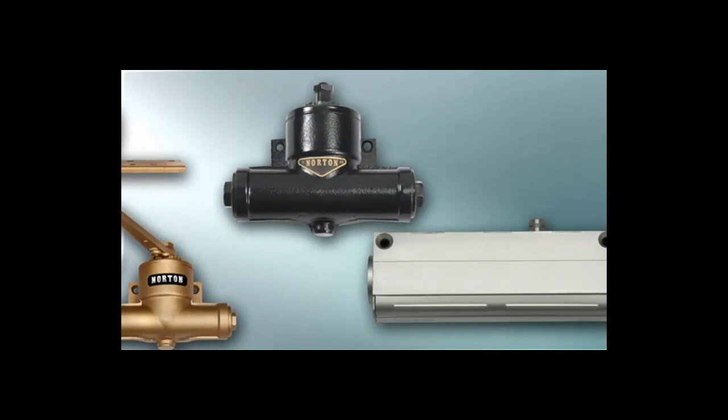In the mid-1870s, at a pastor's request, Lewis C. Norton quieted a door at Trinity Church in Boston with his first door closer. From that Boston church to our headquarters in Monroe, North Carolina, things have come a long way. But even with the many advances in product design and manufacturing, our focus continues to be on the needs of our customers. Our engineering team uses the latest software to develop innovative, high-quality, and reliable door control products. From standard door closers to fully electronic door operators, our products are designed with commercial and institutional environments in mind.

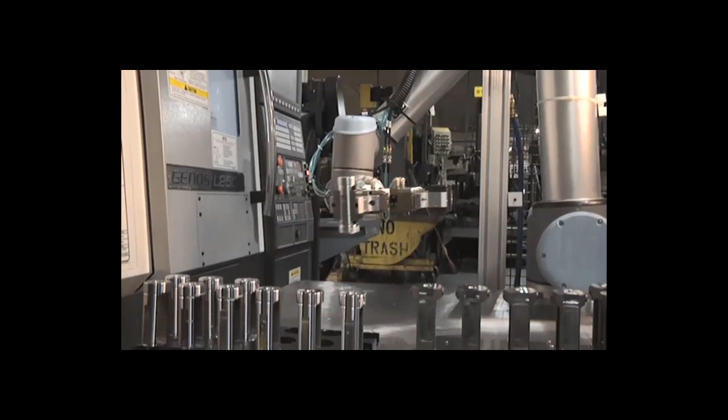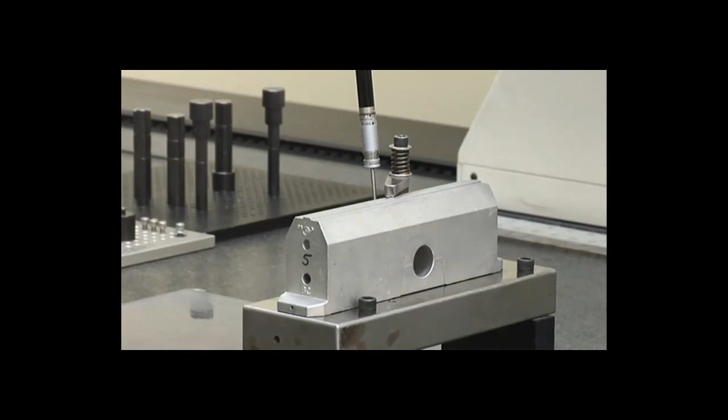These products are then produced using high-tech manufacturing and assembly techniques in our ISO 14001 certified operation. And of course, rigorous testing is done to ensure the quality necessary for tough applications and to meet ANSI BHMA standards.

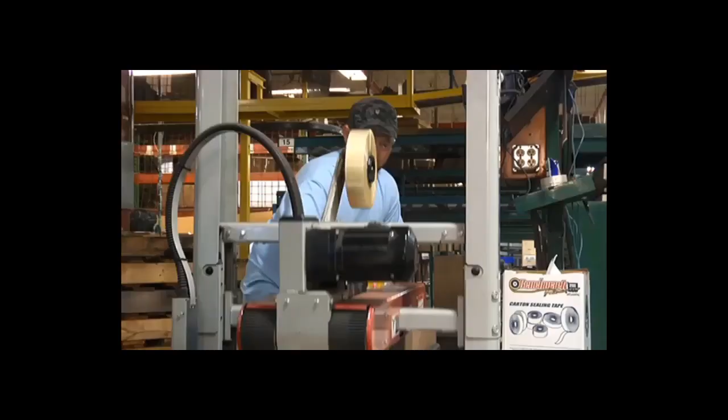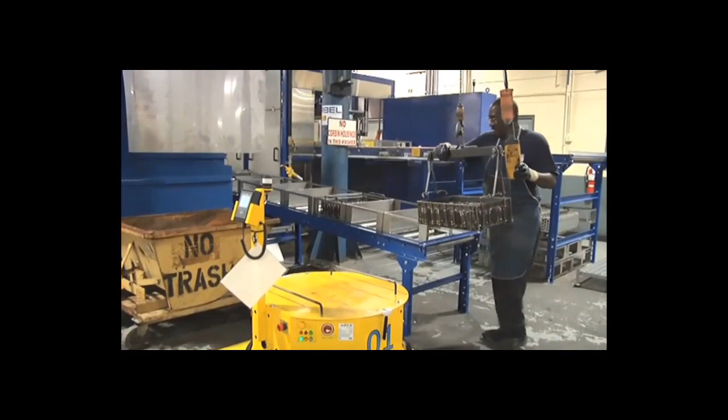And our most important asset is our people. These hard-working professionals are dedicated to making the best door control product you'll ever buy. And we're dedicated to making Norton a great place to work. For all these reasons and more, we think Mr. Norton would be proud of our continuing dedication to making innovative, quality products to meet our customers' needs.

I always like to show that video whenever we're doing a class on Norton. I think it does a really good job of explaining and showing all of the great things that Norton does and their rich history. One of the things that the video talked about was the ANSI BHMA testing that is done on site and then also third-party verified by the testing facility. So all of our Norton operators are third-party tested, and they're tested for durability, cycle life. A lot of the features are tested as well.

So when we say that it can handle a certain amount of use or abuse or cycle life or durability, then just know that all of that is being tested and verified, not just by us, but by a third party. So who is BHMA?

BHMA is the Builders Hardware Manufacturers Association. And the association develops and maintains performance standards for hardware. So you can have lever locks and mortise locks and deadbolts and door closers and all kinds of things tested to BHMA standards. And then ANSI is the American National Standards Institute, and they develop and oversee the process for how everything is going to be tested.

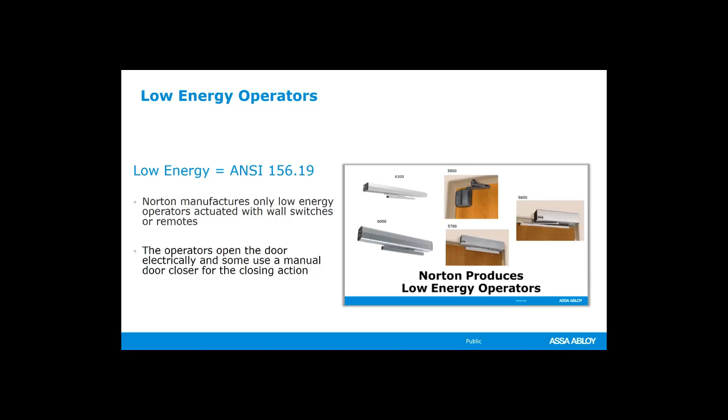That means a push button, a wall plate, a button close to the floor for areas where wheelchairs need to bump up against those buttons. You could also have a clicker, a fob that you use to open these doors. But they are considered safe right out of the box. That's why we're considering them low energy operators. You don't have to have any extra safety sensors added to these operators to make them safe for the general public.

You can, however, add a safety sensor to these operators, and the 6300 has the ability to have safety sensors that stop the door in motion if that safety sensor sees an obstruction. That obstruction could be you, it could be a cart, it could be something else in the way of the door. Those safety sensors are designed to stop the door in motion and either return it to a closed position or return it to a full open position, depending on how you have it set up.

Just because we can add a safety sensor and a motion sensor does not mean that we should hook it up in a way that that sensor is an activation. Technically, you could do that, but we would be turning that operator from a low energy operator into a high energy operator, and along with that, we have all of the regulations that go with it. So safety sensors for obstruction only.

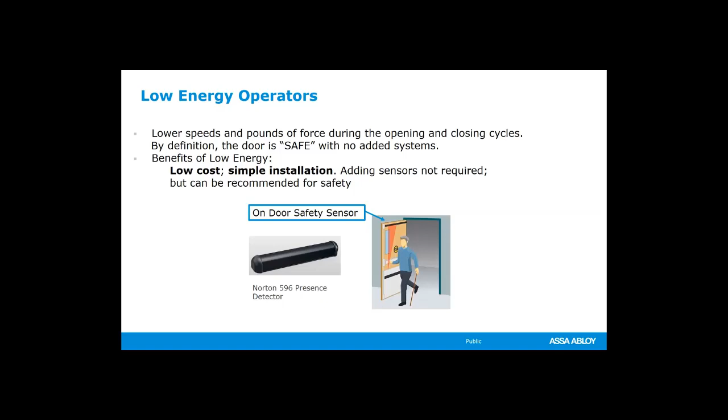So let's talk about some terms and definitions. Low energy operators are really designed to work like a door closer in normal use and can be used for ADA access. We do have operators out there that get used almost every single time somebody walks the door, using it by hitting the button, or using it in a push and go feature, which we'll talk about here in a minute.

But there are some similar definitions to door closers. Closing time is the amount of time from a full open position to close. But if you're talking about testing, testing is going to be from a 90-degree point. So when the door's open 90 degrees to when it gets to the 10-degree point, that's our closing time. Stick within the standard - we need to make sure that's at least 5 seconds. And then your last 10 degrees is your close check or your latch speed. That's also adjustable on most operators.

And then our closing force, how much force that operator is pushing into the stop to close that door, can be different between an electrohydraulic and electromechanical operator. Today's operator we're talking about is electromechanical, so we can change that force with the settings on the circuit board on the LCD screen. We can also change those settings using our Wi-Fi capable device.

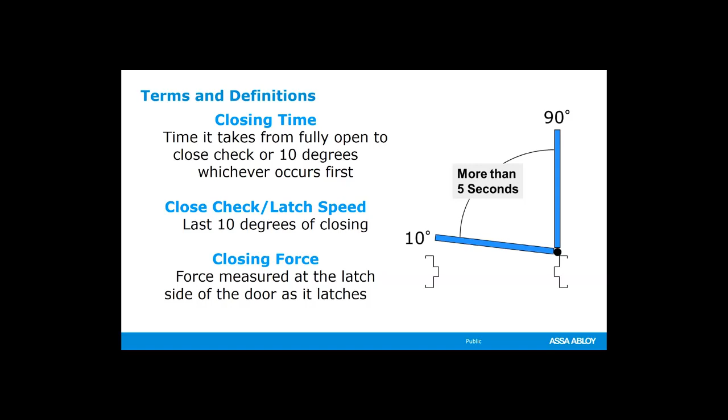So next, let's take a look at an advanced feature that we can turn on for the 6300.

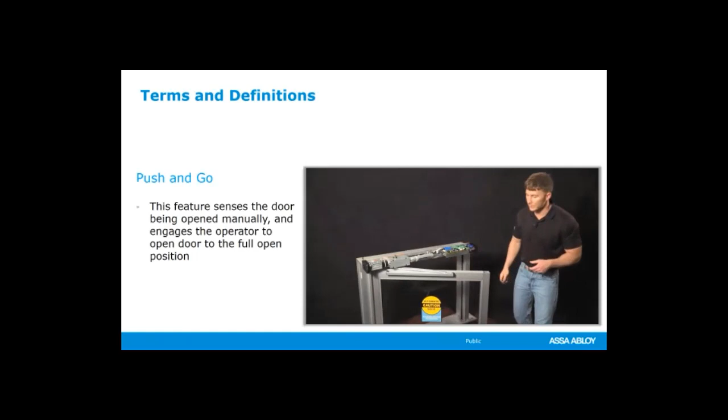Now, we should have an activation switch, but sometimes people don't see those activation switches, so power assist is a really cool feature built into the 6300 that we can turn on. The next feature we're going to take a look at is push and go. The way push and go works is if you open the door slower than the opening speed setting, the door will automatically start opening. If you open the door faster than the opening speed setting, it will not open.

It'll work just like a standard door closer.

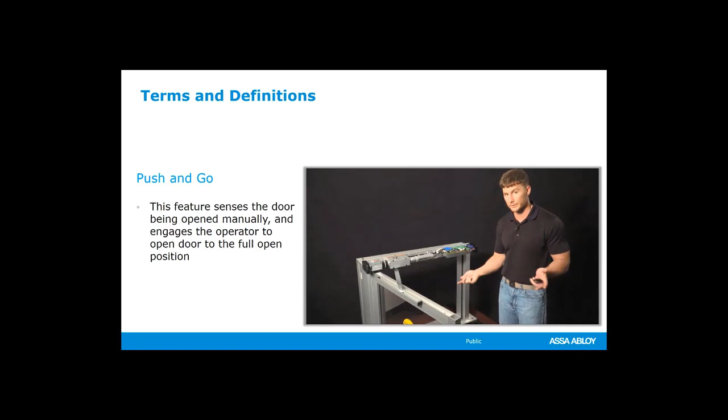This particular feature, push and go, is something that we can turn on. It doesn't come on automatically, but we can enable it if a facility wants it used that way. For instance, we have an engineering facility here in Dallas where all operators are turned on with push and go, because they're constantly moving carts in and out of the doors, and they want to be able to push the cart against the door. The door senses that movement and opens to its full programmed angle.

Now, earlier when I was talking about power assist, you cannot have power assist and push and go running at the same time. Honestly, I wouldn't recommend push and go in a facility where disabled people will be using the door, unless it's just wheelchairs. If somebody is leaning on the door for support and the door leaves their hand and goes to a full open position—on some doors you can program the operator to open all the way to 180 degrees—that may startle the person, they may lose their support and potentially fall and injure themselves, so we don't want that.

Next, let's talk about obstruction detection.

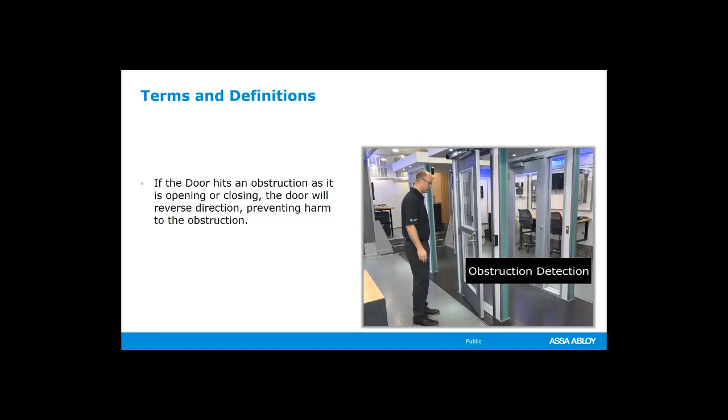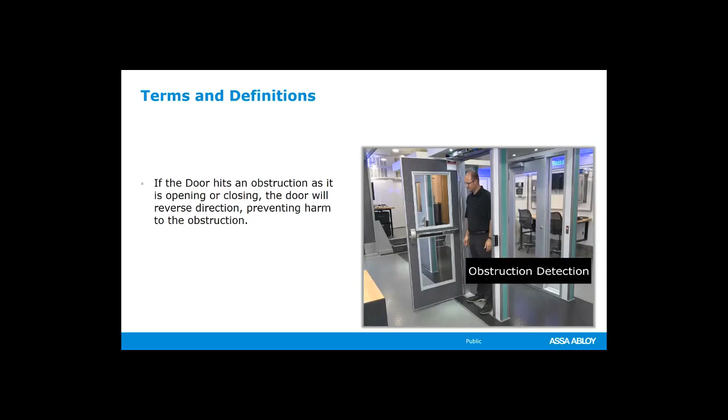Ever since this operator came out, I've been very impressed with the obstruction detection capabilities. This operator can sense obstruction detection on both the opening and closing motion of the door. We can actually adjust how long the operator pushes on an object before it deems it an obstruction—not the force, but the time—from 1.5 seconds all the way up to about 7 seconds or so. I'm really impressed by how lightweight it is; it doesn't push against an object very hard before triggering that obstruction detection. Many of these settings are adjustable.

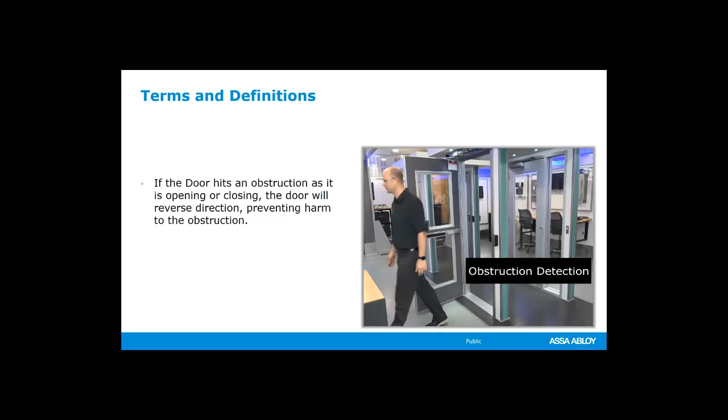This particular operator, as well as our 6000 series, has the ability to be hooked up in a vestibule situation. A button press on the outside of a vestibule will trigger the first operator, and then you set an opening delay output, meaning we signal a second operator to open after that delay, so a user only has to press one button on the outside and the second operator opens automatically. You can also set it up in reverse if they're on the inside of the building.

So vestibule delay—these are advanced things you can get on some of our competitors' products, but you have to pay extra for them. On some of them you have to pay extra for built-in relay boards that get mounted on, and Norton likes to include these automatically.

Next, in some facilities you need the operator to go from a full closed position to a full open position if the fire alarm or smoke alarm goes off. In some facilities there's a safe smoke area at the top of the building for evacuation, and we can trigger that with an output and an input that allows the operator to open whenever the fire alarm or smoke alarm goes off.

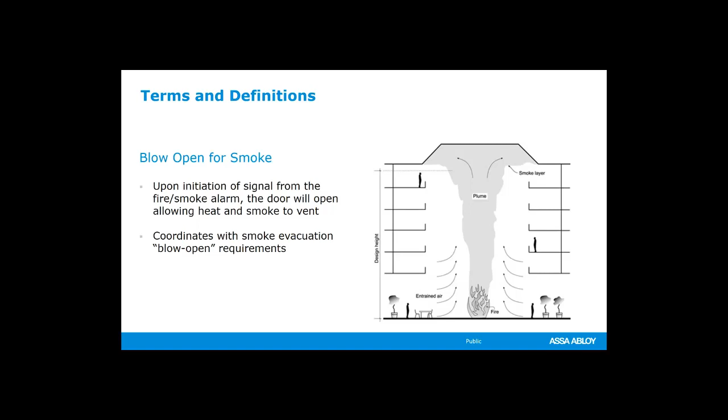Next, we're going to watch a quick video that does a good job going through an overview of this, and then we'll get into some more detail.

Smart, simple, and good looking. The 6300 low energy door operator offers users enhanced safety and operation while blending with the aesthetics of your facility. Important safety options like latch assist ensure doors close and latch, while obstruction detection safeguards all users. Push and go and power assist make each person's interaction with the door almost effortless. A modular 4-piece design with a full-length backplate that doubles as a template allows for easy installation.

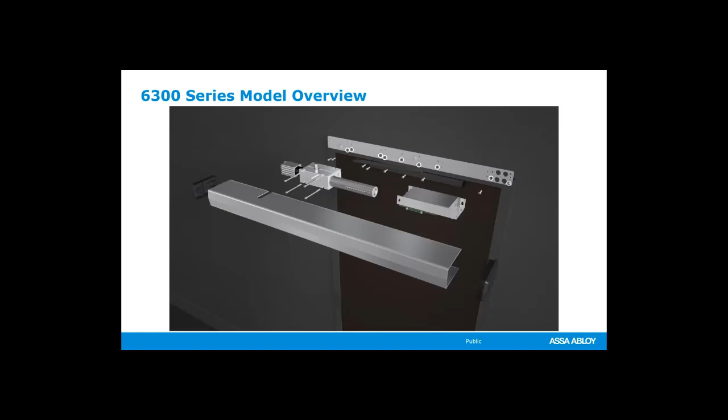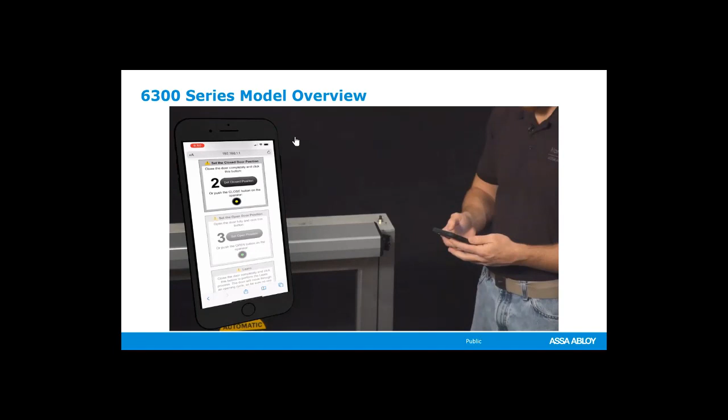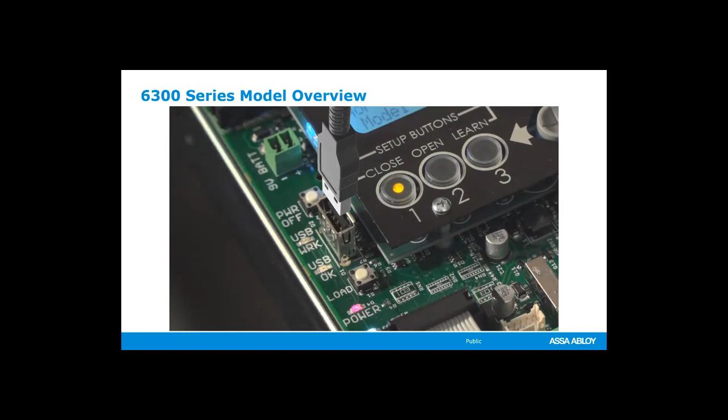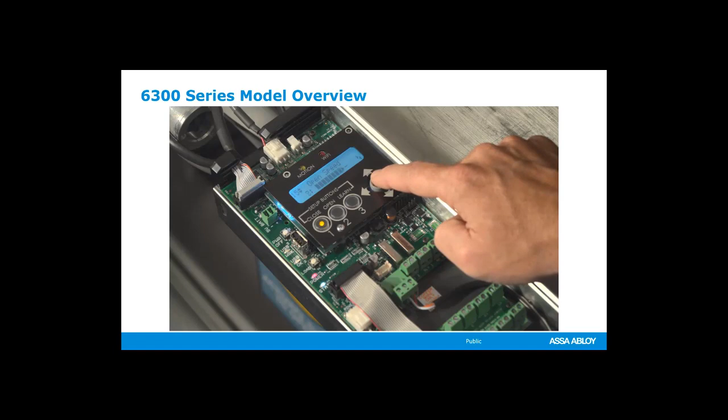Norton introduces the first door operator with online programming capabilities on any device with a Wi-Fi connection. Programming and future adjustments are simple and straightforward, allowing users to make precise settings. Those same settings can also be standardized across multiple units through a USB port. This state-of-the-art development enables fast, easy commissioning and long-term ease of use, eliminating the need for expensive service contracts promoted by other, more complicated door operator companies. Featuring one of the industry's slimmest profiles, the 6300 operator blends into the frame of any single or double doorway. Smart, simple, and good-looking—Norton 6300 low-energy operator delivers all three, from open to close.

One thing I wanted to mention: on our training doors at ASSA ABLOY Academy, as well as the sample doors at Norton, we have our circuit boards turned basically upside down so you can see them from the top. In a proper installation, your LCD screen, your 3 buttons to set close, open, and learn, and your joystick are all going to be facing down so you can see them standing underneath the operator. So the operator behind us that we're going to look at has its control board the wrong way up, just to make it easier to show people how to use it.

Next we're going to look at the updates, because this operator recently got the Wi-Fi programming. You saw that in the last video, but I want to show this one because it goes through some of the other updates we made. This operator was first available in 2017, and on my mobile installation training vehicle I have one of the original operators that is still functioning today after we've programmed and set it up about 800 times. But I do want to show the updates because I think they're pretty significant.

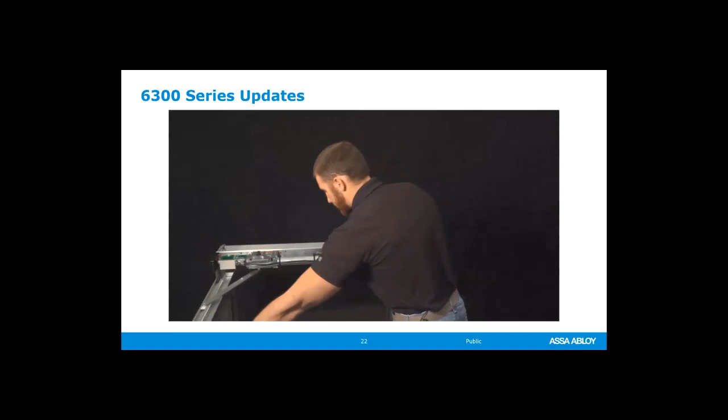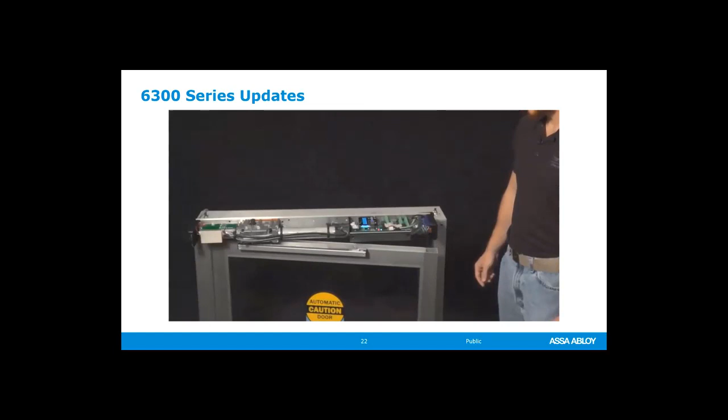Button number 1 is used to set the closed position. Button 2 is used to set the open position. And button number 3 is used to enter the learn mode. The door will step through an opening cycle as it learns its environment. Allow the door to complete the cycle and close before proceeding.

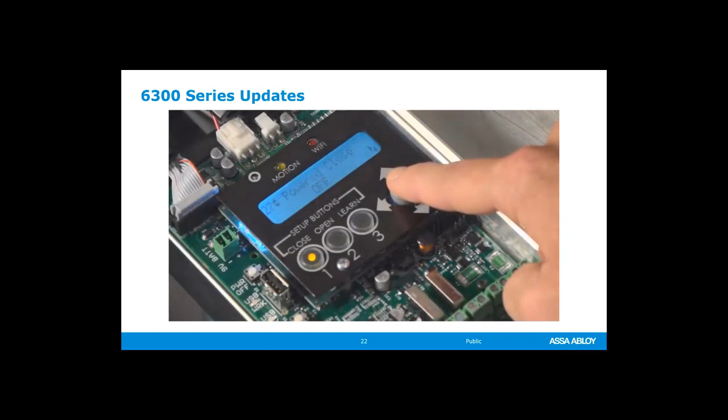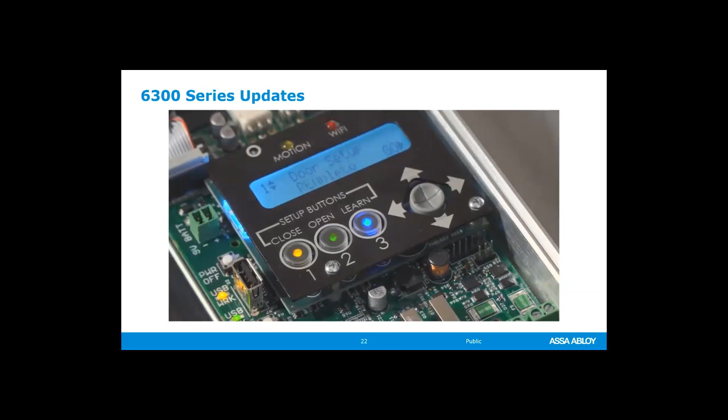All the other settings and features can be accessed using the joystick. Toggle up or down to arrive at the desired category, then left or right to increase or decrease the value. When turning features on or off, toggle right for on and left for off. And finally, in the rare instance that a full factory reset is required, just hold down the small power off button for several seconds and all parameters will return to their original factory presets.

One of the updates with this operator is that now you can change it from a push mount to a pull mount, and it's also now available with different arms in a kit. If you put a 40 in the last 2 digits of your part number when ordering, you'll get a push and pull kit—it comes with both arms, the track arm and the regular arm. They also already work right hand or left hand, so out of that kit you could get this to work in just about any situation.

So let's watch that video.

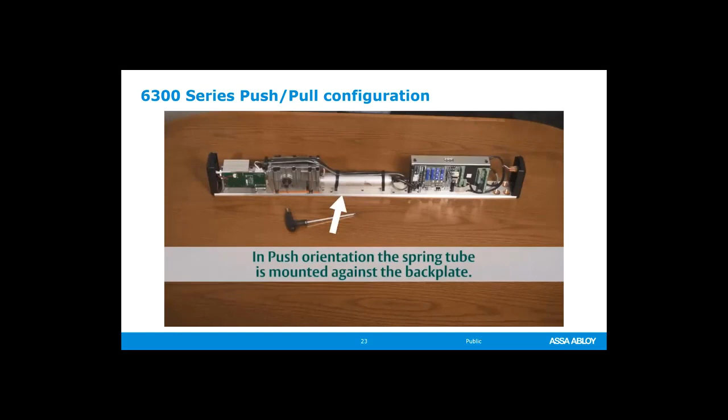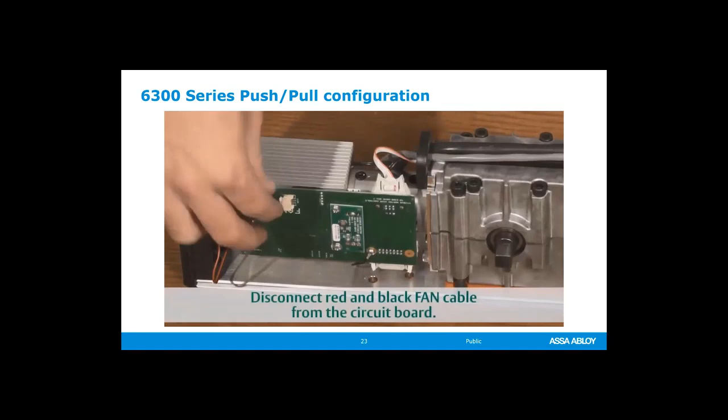Installers of the Norton 6300 door operator may find it necessary to switch the orientation of the unit from push application to pull, or vice versa. This is accomplished by simply flipping the closer body on the back plate. First, disconnect the motor cable and the ribbon cable at the terminals adjacent to the power supply. Also disconnect the small red wire which runs from the end cap to the green circuit board.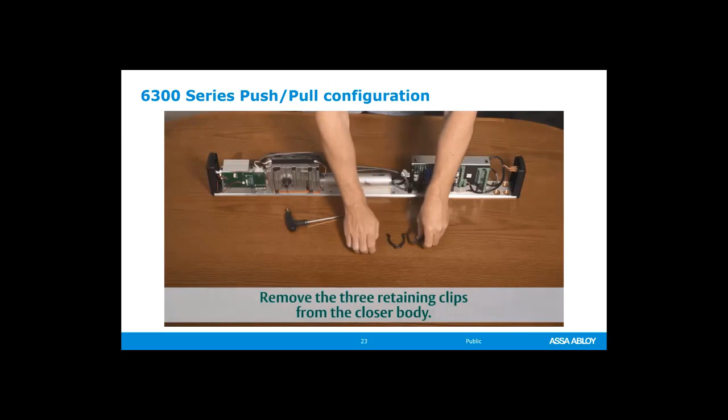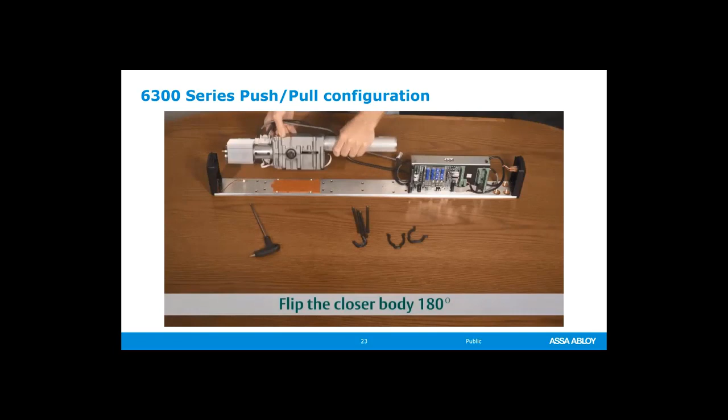Remove the 3 retaining clips which hold the wires to the closer body. Next, remove the 4 long screws to free the body from the back plate. Flip the closer over 180 degrees, then reinstall the retaining clips, being sure to keep the wires neat and straight along the spring tube.

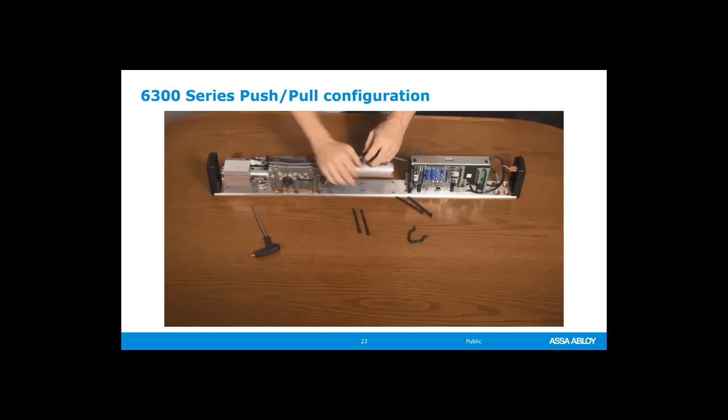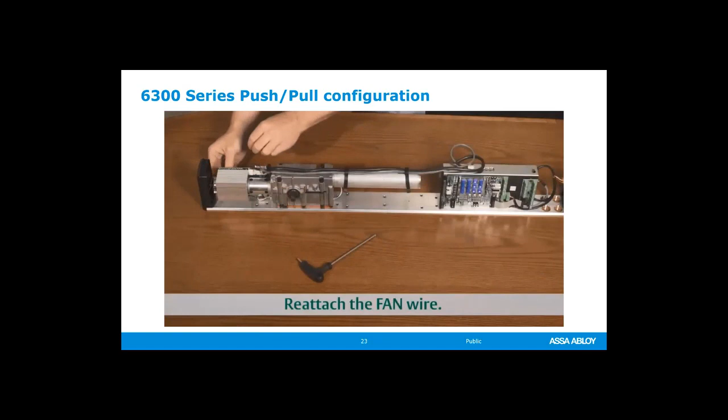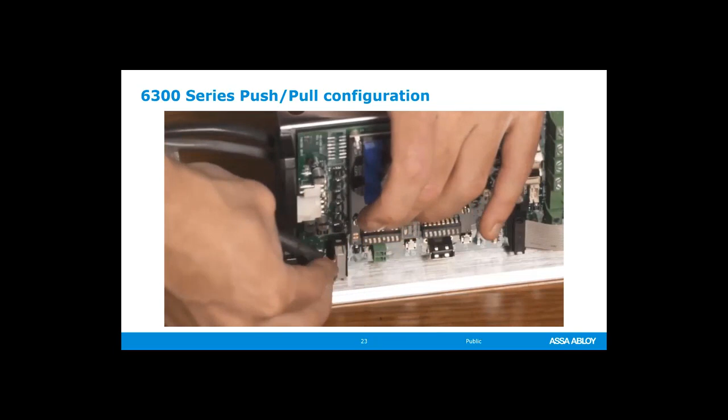Reattach the closer body to the back plate with the 4 long screws. Attach the small red wire from the end cap now to the back side of the closer body, and reattach the ribbon and motor cables to the power supply. The 6300 operator is now ready for a pull application. To convert from a pull to a push application, simply reverse the procedure.

All right, now we're going to attempt, to the best of my ability, a live demonstration of how we hook up an iPad to the Wi-Fi signal that the operator is broadcasting. So let me make sure that everybody is clear on this.

If you're working in a facility that doesn't have Wi-Fi, or maybe they have Wi-Fi but don't have a network set up yet, you don't need to worry about network. I'm not going to have my iPad hooked up to my network here in my office. It's actually just going to be communicating directly to the operator. So we need to have that signal broadcast from the operator first. It's not broadcasting all of the time. The serial number on the operator is the default password that we would need to put in. That can be changed.

If you don't want somebody opening up the little side panel where the on and off switch is and seeing what the password is to get into your operator and change settings, then you can change that password. You can make the password the same for all of the operators in your facility. Just something that I wanted to note.

So here on this view, before we actually stop sharing and look at a different view, I want to highlight that Wi-Fi light needs to be on in order for it to be broadcasting a Wi-Fi signal. So if you're having a hard time finding this operator on your phone, iPad, or laptop, we need to make sure that Wi-Fi light is on.

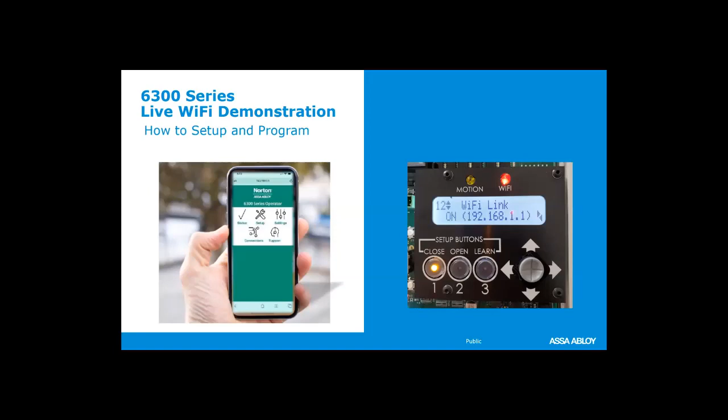For configuration options for this operator, Norton does a really good job of designing these charts to where we can see exactly what part number they would be depending on what we want. This operator comes in 2 different lengths: the 37 and 3/8 inch overall length, or the 39 and 5/8. The idea behind the longer one is if you have a 3-0 door with a 2-inch frame face, this unit is just shy of those 40 inches, and it looks very clean and seamless on the top of the door.

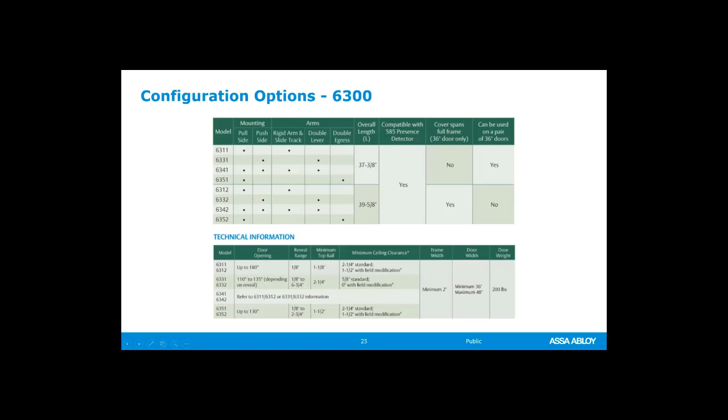But check all of these out. I'll show you how to access the ASSA ABLOY Resource Center with Norton to find all of these useful charts here in just a couple of minutes.

So when we're talking about applications, you got to think about what this operator is capable of. On a push side, walking, with the door on the push side, it can power open to 135 degrees. That's quite a bit, more than most operators, so that's a plus. On the pull side, if you don't have an obstruction in the way, you can template it and open it all to a full 180 degrees. So if it's a corridor, that's great. You can get that door to hold open all the way up against the wall.

You can get this in, like I said earlier, a universal pull, push, right hand, left hand kit that comes with the push and the pull arms. It's very, very low profile, so if you have a lot of things above your door that would normally prevent an operator from having room, because this one is so slim, oftentimes it will fit.

It is a medium to heavy duty operator designed for doors up to 200 pounds, door width up to 48 inches. Double egress door applications are available; you do need to specify the hand of each one of those units. We can also do double door, and with double door, just note that it's not a continuous cover — it's 2 operators next to each other. It comes standard with a 2-year limited warranty.

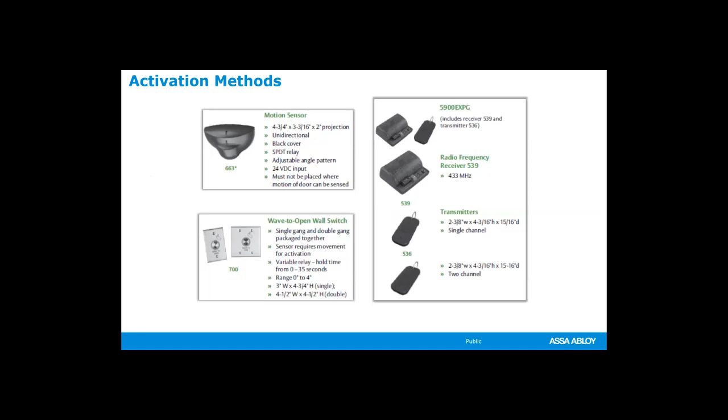For activation methods, there are several different switches that you can get: wall switches, wave-to-open switches that are available, as well as motion sensors, and fobs where you can order this wireless — for your wireless fobs or even wireless push buttons. Here's a listing of several that are available, both in narrow style, double gang, recessed into an existing box, so if your electrician puts a wall box, you can use those as well. We also have some that are built into a box that surface mount onto the wall.

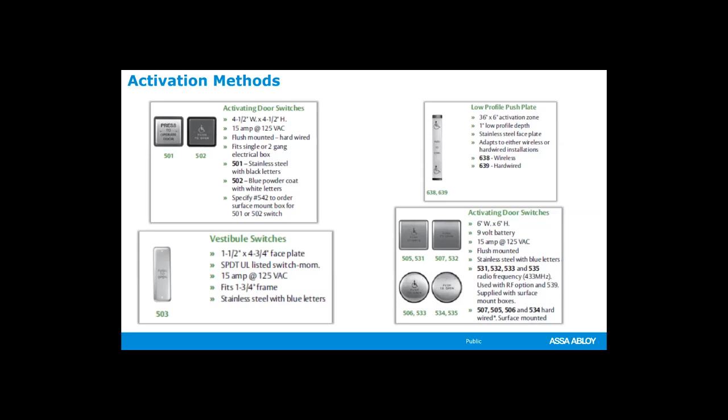Also, we have 36-inch long plates that go down for wheelchairs to bump up into. Some facilities require that in their code.

For the part number layouts, Norton does a really good job of having all of their part number layouts consistent across all of their products, their door closers, their operators. The first 2 digits are always going to be the series. The next digit is going to be the configuration. The 4th digit is going to be the length, followed by the finish, and then any extra things we want are going to trail that part number.

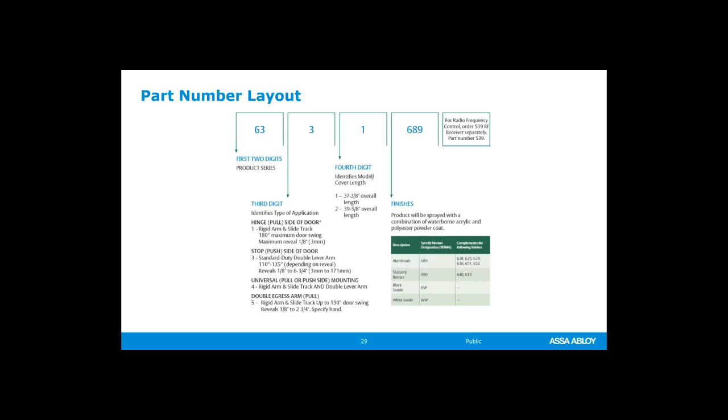So let's take a look at the price list. Again, this is a training class, we're not providing quotes here today, so we only look at list costs, and Norton has the right to change these prices at any time. This is just an example of how you would use the price book. Right now we're on the table of contents on the second page, looking at the 6300. It tells us to go to page 46.

I'm going to price the double lever arm. If we do that, the 6332 double lever arm, I want the full length operator. I would like the 700 series wave-to-open touchless switches — I think they're really awesome, we can just wave and the activation will work within 4 inches of the wall switch. I'd also like a presence detector, that motion sensor that can trip obstruction, because I think that's necessary in some facilities. So we need the operator, 2 wall switches, 1 presence sensor, and then that's my total list price right there.

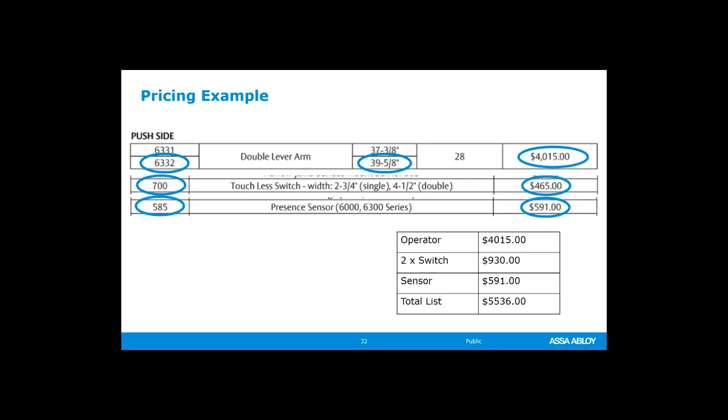Next, I want to show a video of the touchless solutions that we've put together since COVID, and they're going to stay in our catalog. We'll continue doing this.

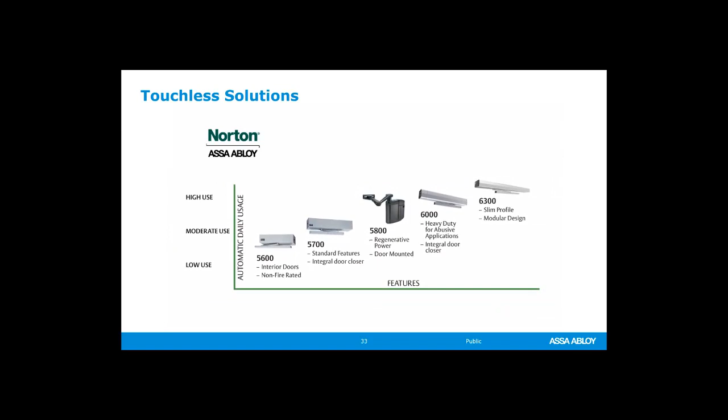The Norton portfolio of low-energy operators provides many hands-free methods for opening all varieties of doors. Radio frequency devices automatically open doors when coming into the range of the door operator's sensor. Wave to open switches, coupled with Norton low-energy operators, allow occupants to easily move through a building without transferring germs or leaving messy fingerprints.

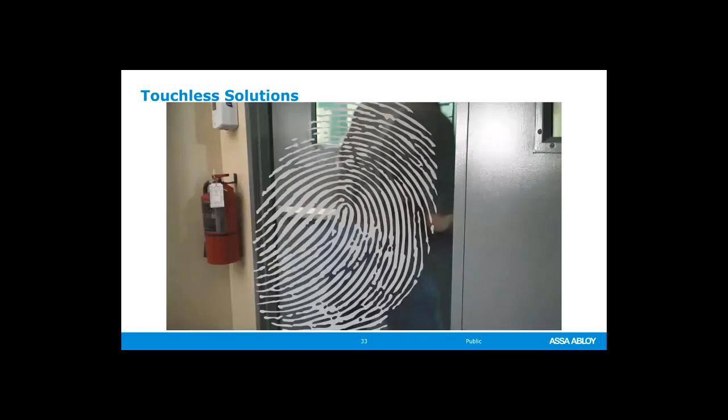These highly sensitive devices pick up hand gestures within 4 inches of the switch, ensuring operation only when intended. From bathrooms to building entrances, these touchless door operating solutions provide a healthy means for meeting ADA requirements in all sorts of buildings.

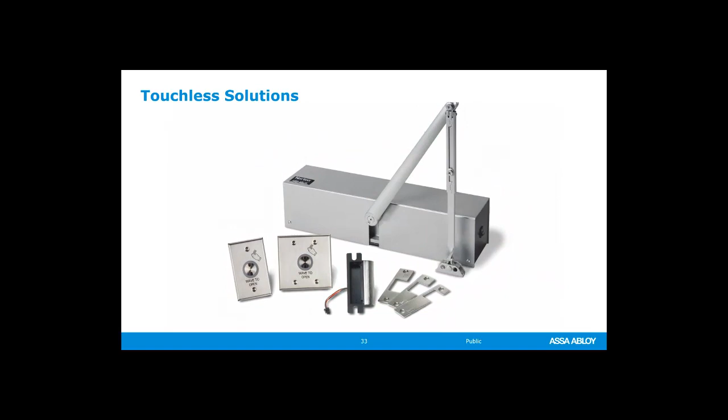Norton offers complete kits of all components needed to automate a door, including a low-energy operator and wave to open switch. Wave switches and RF devices are also sold separately. Leverage the proven reliability of Norton door controls to ensure the ease of use and safe operation of all building doors, from open to close.

So if you're like me, you're always trying to find information. And if we can find information easily, then I'm all for it. I personally think the easiest way to find this information for ASSA ABLOY, at least, is the ASSA ABLOY customer support app. This is something that even me as a trainer, I use it all the time. It's a free app available on Android and Apple. It allows you to get in touch with customer service and tech support right on your phone.

So if you're working on the 6300, maybe you've got a question, you can actually live stream a video with a tech rep and show them exactly what you're working on. It really cuts down on that communication time back and forth. You can show a tech rep exactly what you're doing. I think that's really, really beneficial.

Not only can you do that, but the app also directs you to the ASSA ABLOY Resource Center. The Resource Center houses our digital library that has the catalogs, the price book, all of your installation sheets, cut sheets, sales sheets—everything that you could need about our product is available through the app that ties to our website. Warranty certificates and everything else are also contained there.